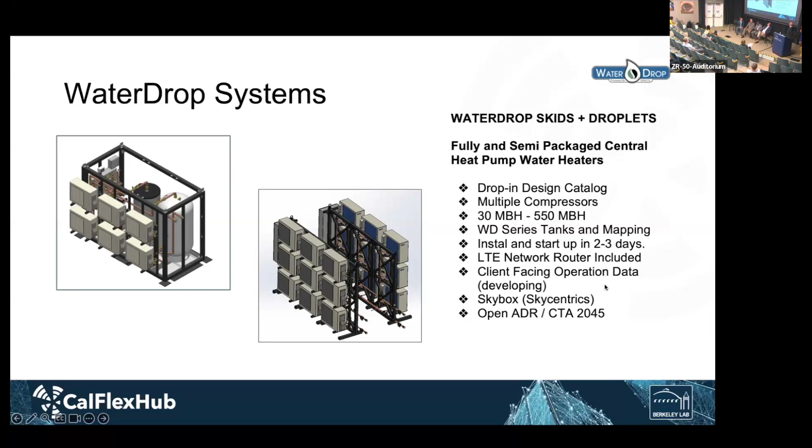Along with the central heat pump water heater, the heat pumps, the controls and all that, we wound up designing a custom line of tanks to capture different temperature points across the thermal wells across tanks. We're looking at a picture of one tank, but in our systems there could be multiple tanks in series, in parallel, because the storage volumes will be anywhere from a couple hundred gallons to a couple thousand gallons. And we are now looking at it as thermal storage, so we want many, many measurement points.

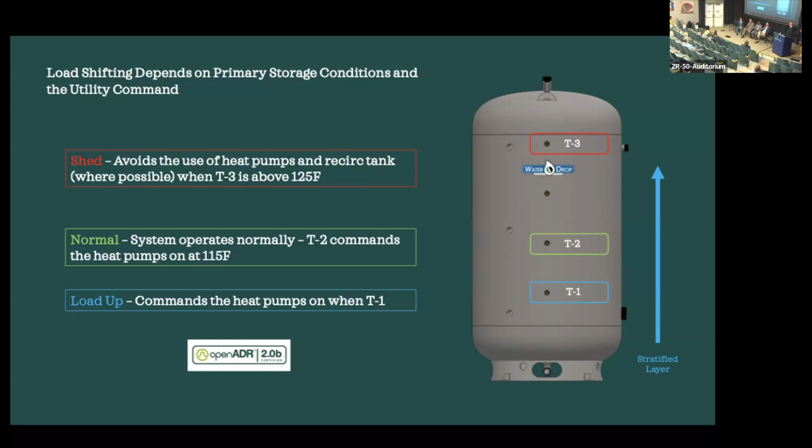Next slide. Along with the measurement points, we have the ability, last slide actually, to reach in and understand the condition of all the tanks, the full thermal storage system, and the controls.

We use a product called the Skybox to reach in through our LTE network router into the Skybox. Skybox reaches into our PLC. PLC starts looking around the entire system, understanding the status, running various programs. And in our programming world, we are completely happy to get a UCM from a utility and run a utility-driven program. But we actually owe our customers some value right now, which maybe is a separate comment, and we can run additional native programs to avoid the purchase of high peak rate electricity.

So we've got storage, we've got control, we've got in our systems compressors from 2 to 36 compressors in some of our systems, and we can vary all of those and give it a run, no run signal, and do quite a lot. I find it very, very exciting, and I'm looking for more.

And I think the next potential for us, because I have a minute and a half so I can go off on it, is grid edge. Because really we're in a multifamily building, right? And we want to be as localized in energy usage and command as possible.

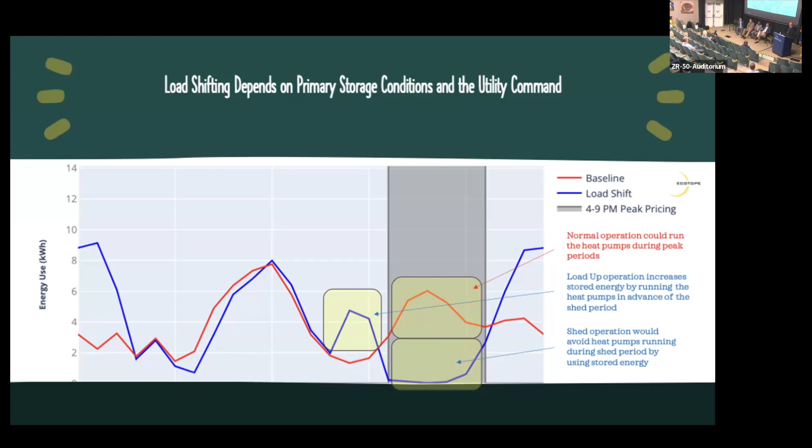I can't turn my neck that far, so I'm going to stand here and make more space.

Just a little introduction to A.O. Smith. A.O. Smith has been around for 150 years. This is our 150-year anniversary. In case you don't know about them, they make glass-lined water heaters, Harvestore silos, automotive frames. We've ventured out of all of those businesses, and we're concentrating now on water heating and water filtration. We've been making water heaters since about the 1930s, and we learned how to put glass on steel without the glass falling off.

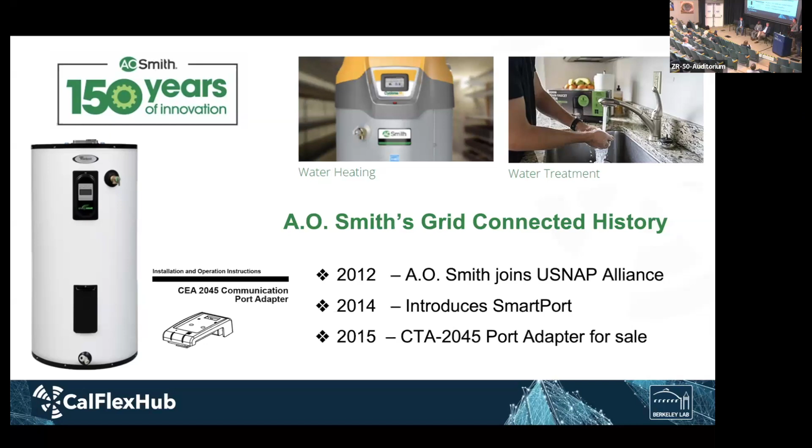So we've had a lot of pilots since 2015, trying to understand how a water heater should respond to grid signals. Next slide.

This is our lineup today. These are all now CTA 2045 compatible, no longer needing a bridge adapter. We've got a lineup from electric, to heat pumps in the middle, to 120 volt heat pumps on the right. We have Wi-Fi connectivity in most of them. We have a utility version that does not have Wi-Fi, API connections. You see on the bottom we have leak sensors, shut-off valves on the top, built-in mixing valves — a pretty extensive lineup.

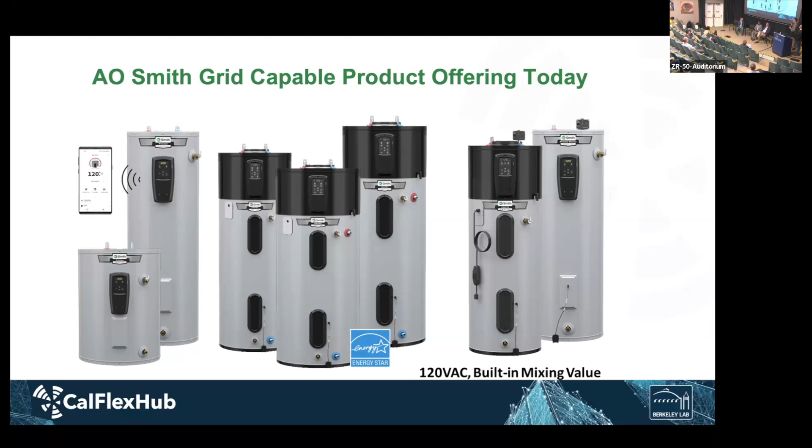And I'll highlight one of them in particular, the 120 volt version, on the next slide. So the 120 volt version is a shared plug. It's got a 900 watt element inside, so it can be plugged into a standard outlet.

Standard things apply with the heat pump technology — you need some sort of space to cool, so you can't put it in a closed environment. It has top connections; our first introduction to water heaters had side connections. The top connection allows it to fit existing gas applications where the hot and cold come in on the top, so it's retrofittable. Most importantly, it's quiet.

Our water heaters didn't make any noise before, but the heat pumps were a little bit loud for people, so we redesigned the fan to make that super quiet operation. And like I said before, it has leak detection and a shut-off valve.

We were hoping that this would keep them connected because we want to know when your water heater starts leaking, so you want to make sure it gets connected to Wi-Fi. But unfortunately, it's still in the basement, out of sight, and it doesn't always stay connected. So if you're not connected, you're not going to get that alert. We're hopefully trying to highlight the fact that you really want your water heater to be connected to Wi-Fi at all times.

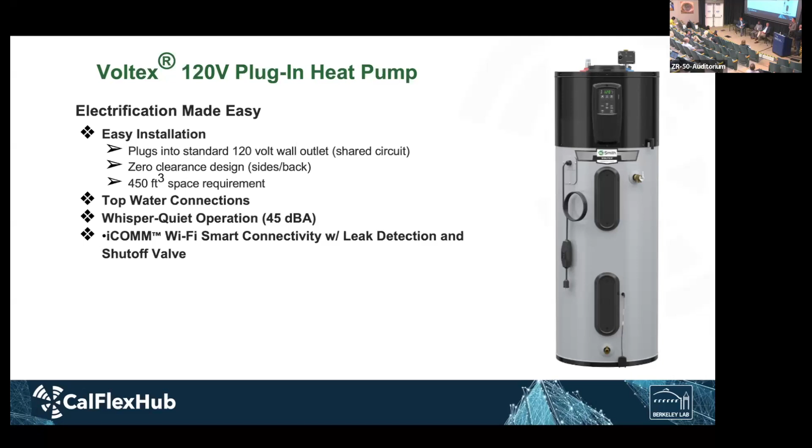And the last slide here, I'll talk a little bit about our app. Our app can communicate to the water heater in two ways. One, we can do demand response, off to the right. We either do it through our water saver program through Virtual Peaker, we can do APIs through our Wi-Fi, or we can go through CTA 2045 modules for the demand response.

For the time of use rates, we go through our app. It's a series of pages where you pick the utility, you pick your rates, and then most importantly, you pick your user preference. Your user preference basically says what you want to do during the high price periods.

When we first came out with that, we had some customers who said that they wanted the water heater to turn off during the high price periods. We thought they bought a water heater to get hot water, so we didn't have that feature. So we added yet another slider application where, during high price periods, they can just stop the water heater from performing. With that, they get a little alert saying that if you enroll in this, you may get a cold water event. So as long as they're aware of that, we enabled that feature, and we hope it's working for those people who want it.

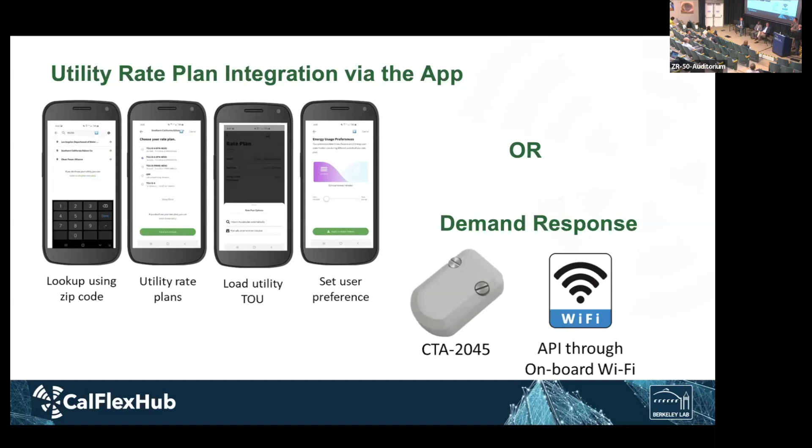Okay. All right. Sure. Right. And since we didn't do that last time, let's step back in time and clap for Albert quickly. That's right. Let's give everyone their just desserts.

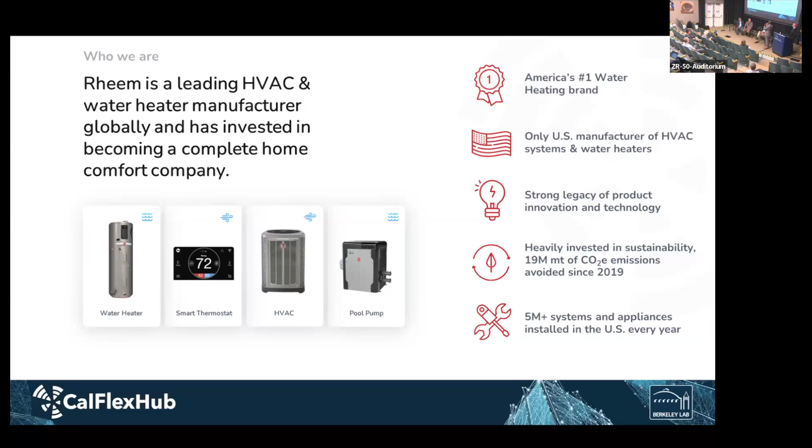Our protocol is what we call our Intel Inside. That can either be done wired, which, let's be honest, in a home, no one's doing that. Commercial, wired also, and that's more likely to happen via RS-485, but also wireless. So again, we have that capacity to really present the whole home as one envelope, because we touch so many components within that building.

Next slide, please. I'll speak primarily on the water heating side, a little less on HVAC. When we talk about HVAC, we all understand a little of the discomfort, and we could go into variable speed and how our systems that talk on our EcoNet protocol are a little more responsive to dynamic pricing, because it's never just an off and an on. We're using variable speed on our high end to provide a little more comfort, even doing a step down on our system, so that you're never in an off or on position on the HVAC side.

On the water heating side, it's a little more complex, because as another panel mentioned, we can't just replace someone's water heater willy-nilly. We can't just slap a thermostat onto the water heater and have it now be part of our program. So we have been building out a very large portfolio of products that has, I always say, everything under the kitchen sink, because we kind of have to.

We have to meet all the regulations, whether it's Pacific Northwest with CTA 2045, California JA13, OpenADR, OEM manufacturers. We have to think of this as the race for Betamax and VHS - what's going to be first? Unfortunately, we have to put everything into our products at this point around water in order to future-proof, and also to make sure we aren't building too many SKUs, right? Because right now we're building SKUs that go directly to Washington and Oregon, and SKUs that go directly to California. So we have to be cognizant about what we have in the future.

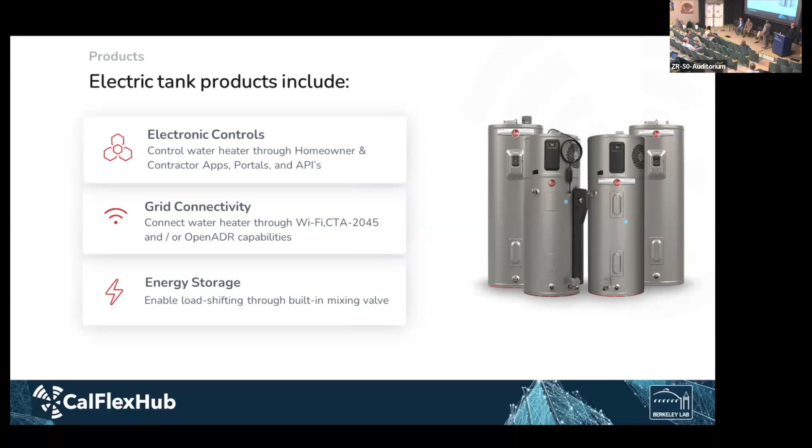Next slide, please, as I'm running out of time here. I want to have this slide to talk about a change in energy efficiency. The DOE has just announced, a few months ago, that on May 6, 2029 - it's a big party - they are changing regulations.

And for the most part, most of the people that are buying resistive electric water heaters today, they won't be able to do that in 2029. They have to push the efficiency up. And so they are going to be forced to move to a heat pump when you think about that 30-gallon and above, which is the bulk of the market. There are still some point of use products, multifamily, that can still be resistive electric, but the bulk of the products out there in the next 5 years are going to have to switch to heat pump technology. So we're trying to think about how do we make sure we're not creating that barrier for customers buying the products they need, but still giving the value for connectivity and demand response.

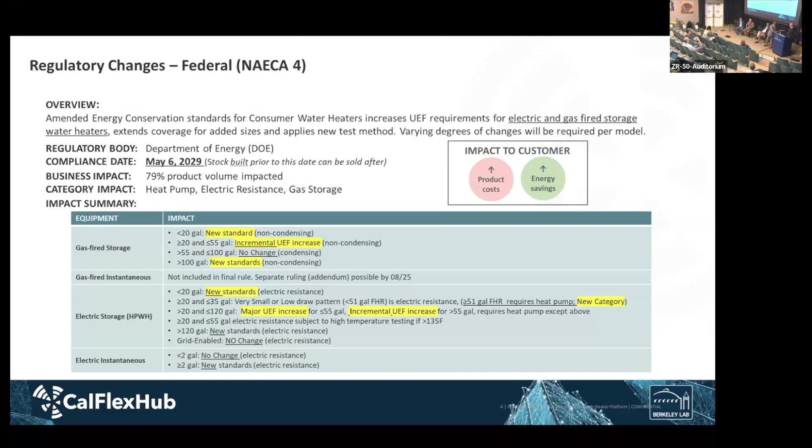All right, I'll keep this. Yeah, sounds good. All right. Well, thank you very much, Chris.

And our last panelist, alphabetically, you may have noticed, is Robert Benjamin from Aris Hydronics, who just last week won the DOE Easy Home Electrification or Home Decarbonization Prize. So congratulations, Robert.

And I did want to mention that LBNL was a big part of our team, and we did research, and one of our researchers, Wei Ping, is in the audience right now, who helped us do modeling on our new system. So you'll see that I have some renderings here, and Aris is a little smaller than Rheem and hasn't been around as long as A.O. Smith.

So we are developing new systems, and one of the things we're heading towards is the idea that what we want to offer is thermal as a service, that all the thermal energy that goes into a building, whether that's single family or multifamily or even light commercial, that we want to be in charge of, and that we're going to think about all of those needs. And since we centralize the production of energy and distribute it through hydronics, we're an end-to-end integrated system, taking care of heating, cooling, and hot water. So there's lots of areas where we can dynamically address how energy is produced and how it's used, especially when we go on to multifamily.

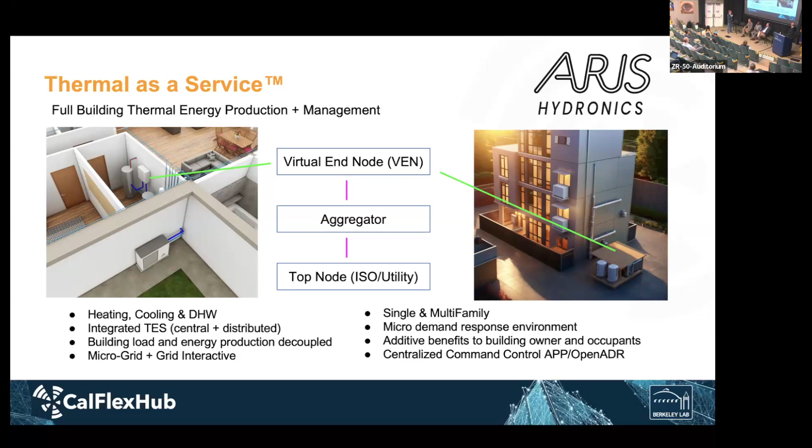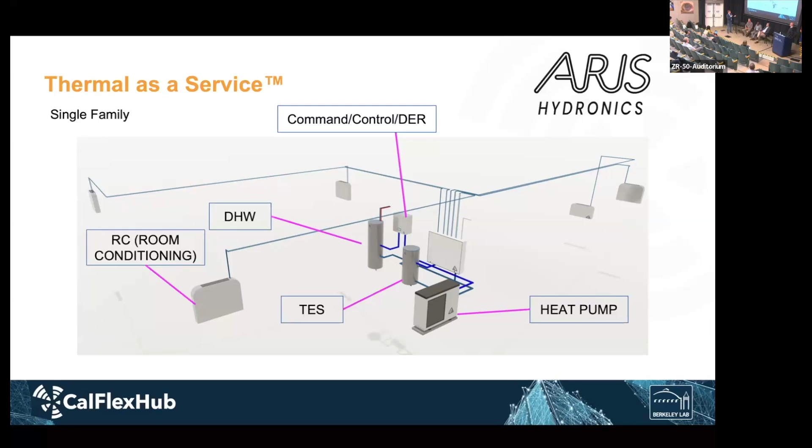But where it gets really amazing, and where we think this is now a grid asset, is that we can control all of the building's thermal energy, and we have a lot of different places that we can store that energy. So we think there's going to be some big opportunities there. All of our systems, we're kind of taking this right now, that since we are coming in behind some people, we're kind of seeing how this is going to play out. In the end of the day, we're going to have a central command and control box. We have a lot of control and algorithms that we have to do on our side to manage that production of energy and distribution of energy. So we're open to working with, I think in the end, aggregators or third parties. So we want to work with someone who's really going to specialize on the demand side.

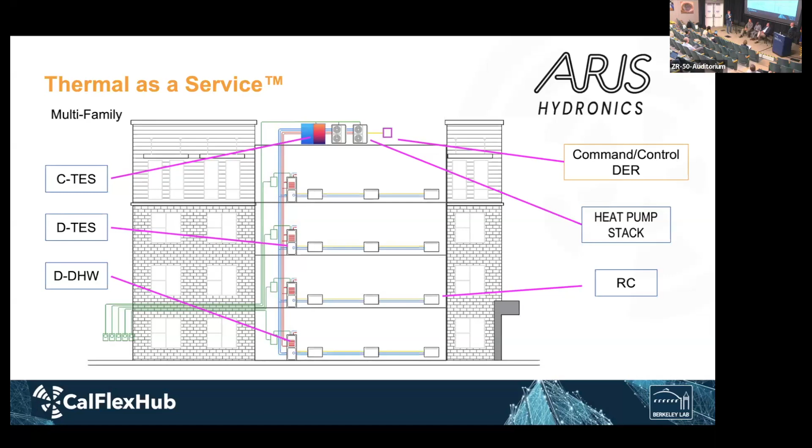So I think that's it for my slides. All right, great. Well, thank you, Robert.